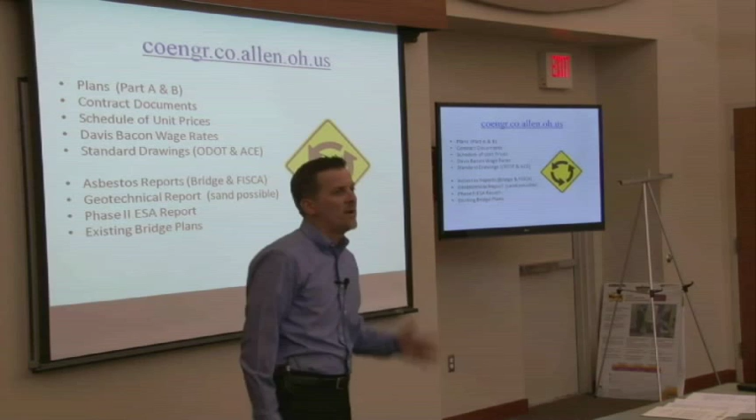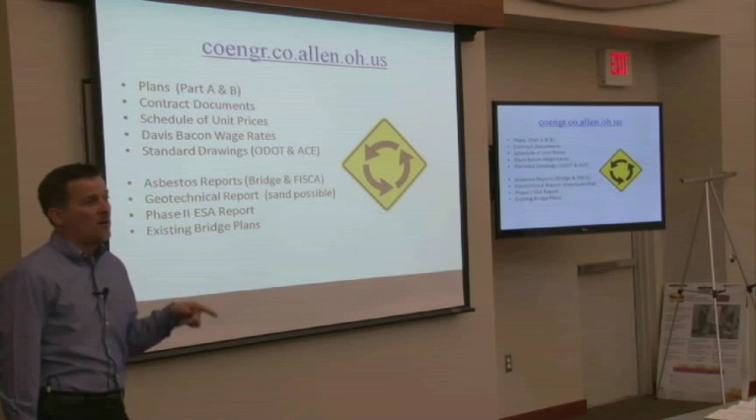But if you have not, and maybe picked up the plans from our office, you can go here and get the PDFs of all the plans, both Part A and Part B, and you can also download the contract documents. Those are password protected, so any of your subs can download that stuff, but as far as the contract documents, I want to know who actually picks up plans, who's going to bid on the job. So if there's any addendums or any changes that come down the pike, I can send those out to all the plan holders. You'll also find Davis-Bacon wages that are requirement on this project, and you will also see all of our standard drawings along with ODOT's standard drawings.

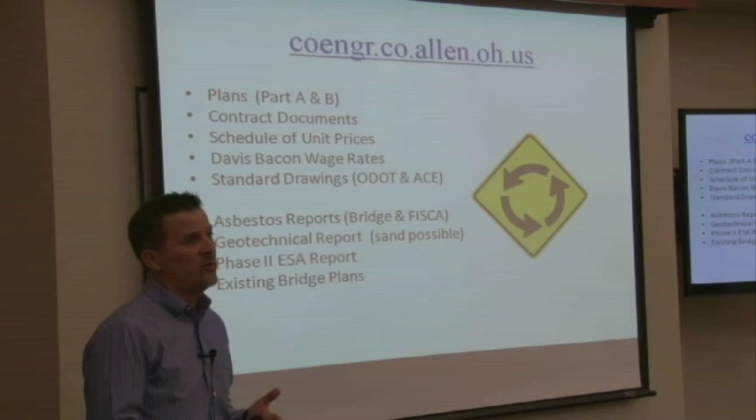In addition to that, we tried to make it as simple as possible for you contractors, and that is that we have supplemental information on there, being the asbestos reports for both the bridge and the FISCA gas station, and geotechnical reports that was done for the project. Just as a side note, on the geotechnical report, I want contractors to know that there has been sand in the area in previous projects, so it is potential that there could be sand in the area. You will also find Phase 2 ESA reports along with existing bridge plans. So those are all great things that are on the website for your use if you care to use them.

This is a roundabout project. It is the first in Allen County. It is also the first in our ODOT district, so we have some big things to cover here. It is a huge project for us. It's probably the biggest project we've ever encountered here at the Allen County Engineer's Office.

$5.8 million is the engineer's estimate. It includes the intersection of Shawnee and Fort Amanda Road, and this is one of the busiest intersections for Allen County with over 14,000 cars per day. So it's very critical for us that we maintain traffic, which is going to be a huge issue for us in this project.

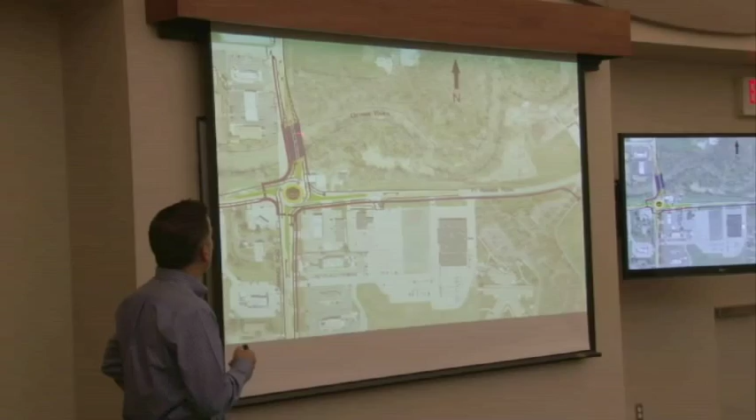Just an overview of the project itself. What we have is a bridge replacement project here that's in blue. At the north end of the intersection, we're talking about replacing the signalized intersection with a two-lane, multi-lane roundabout with splitter islands and sidewalks all along the project on the west side, coming down here in red and crossing over, and then you'll see it on the east side and southeast quadrant of the project along McDonald's and BP and Arby's and some of those other businesses along the east side.

We also have, noted here in purple, a multi-use bike pedestrian path that connects the roundabout and the existing sidewalks in the roundabout to the existing Riverwalk bike path over here to the east. Again, it's just a huge project for us. We're really excited about it, but we're also a little nervous with all the traffic that is out there and the things that we anticipate.

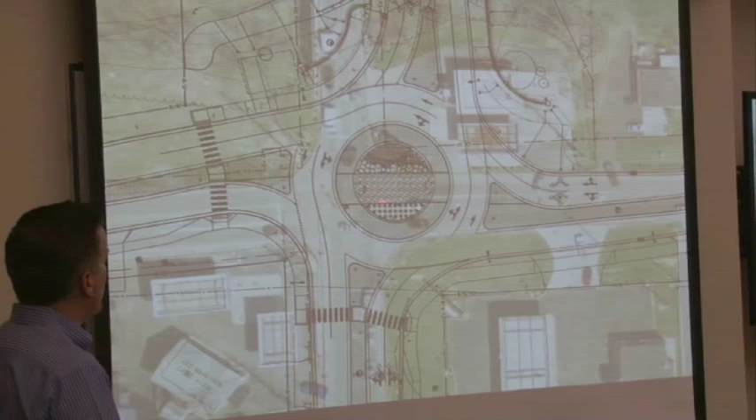This project is somewhat unique as a roundabout project in that we have what we're calling a pass-through through the center of the roundabout. Normally in a roundabout, you have a center island with nothing in it, but in this one, we have to accommodate loads like this.

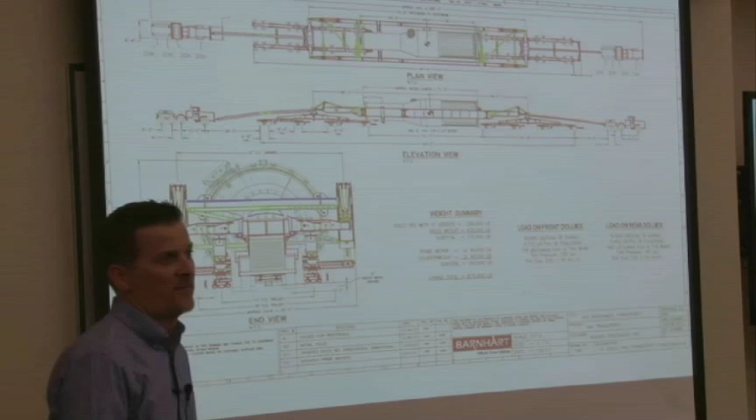This is a load that's trying to be permitted currently to the refinery area. This is a 435-ton unit coming in, a vessel. It is 24 feet 3 inches wide from out to out, being the truss system that's actually carrying the unit.

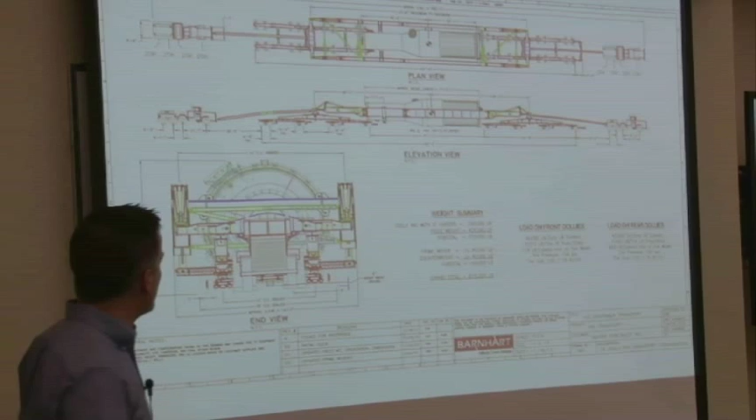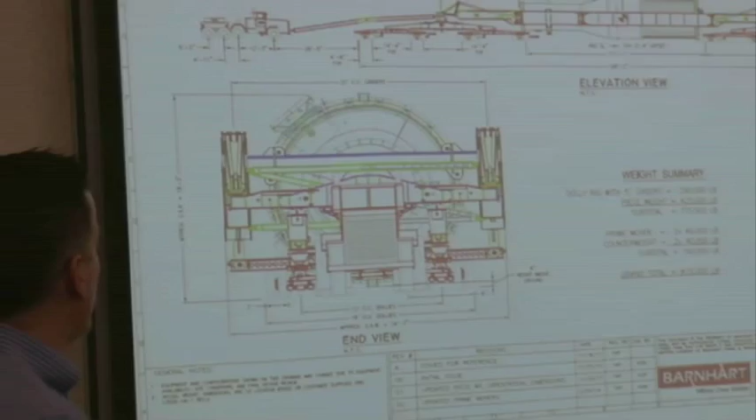So with that, these trucks and these types of heavy haulers cannot navigate through the roundabout, even though the roundabout is very wide and can accommodate pedestrians, multi-lanes with traffic, and also typical semi-truck tractor trailers, but it cannot accommodate vehicles like this.

So that's why we have incorporated a pass-through here through the center island, and with that comes a lot of other issues we have to deal with: signage and crash-worthy items here in the center, and some other items that will come up in the future. But that's what's setting this project off as a little bit unique.

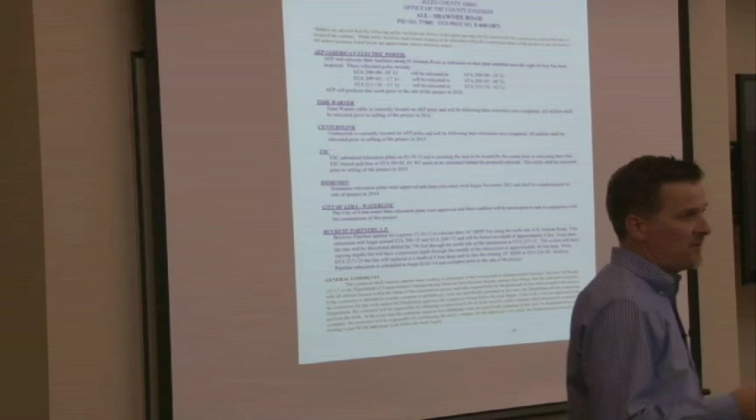I want to go right into utilities on this project. Believe it or not, there are utilities and quite a few of them, and not all of them are here today. First and foremost that comes to mind is AEP, American Electric Power. They have relocated, both transmission and distribution, in the area. The transmission has been relocated on the large steel poles you may have seen if you've been out there.

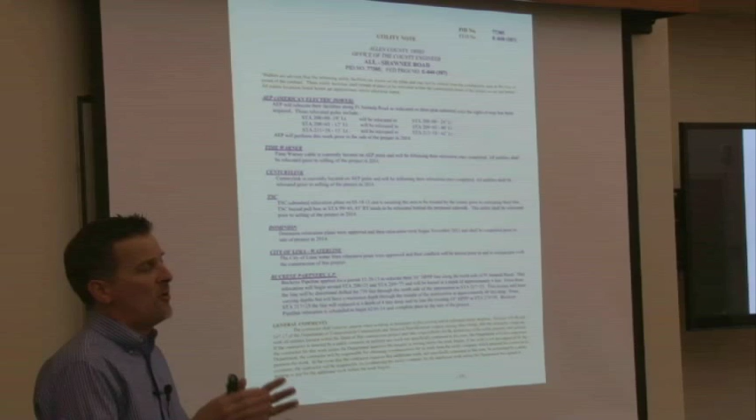Their work is done. But distribution, unlike transmission, can't make that long span across the roundabout. They are unable to do so, so they have moved their lines all but 3 or 4 poles in the Burger King area. So almost all of their work has been completed, but there's a little bit more work to do right there in front of the Burger King restaurant.

And all the other utilities, being Time Warner, CenturyLink, and maybe TSC, are following suit with that. I know some of them are here. We'll go with Time Warner first. Time Warner, I believe, is following right along with the distribution of the AEP. Is that correct? Yes. Okay.

And you are currently not relocated at this point in time, is that correct? Again, what he's stated is that Time Warner is not relocated, but they will be relocating prior to the project. And it's all a matter of moving those lines off the poles onto the new distribution poles.

CenturyLink, do you have any other comments you'd like to make? Is a CenturyLink representative here? Yes, John, correct? Okay, John is here, and I think they're in the same boat, correct? We're currently working on some plans. The utility will be relocated prior to the project starting, but again, they will be relocating on those AEP distribution poles. TSC, is TSC here?

Okay, yes, you're in the same situation. I also know in the southeast quadrant of the intersection, which would be the BP location, there is a handhole that needs to be moved, and we're going to be working with them here in the next couple of weeks to locate their spot where they need to relocate. My understanding from Randy is that's a fairly simple operation and it'll be done prior to construction, correct? That is correct. Okay, excellent.

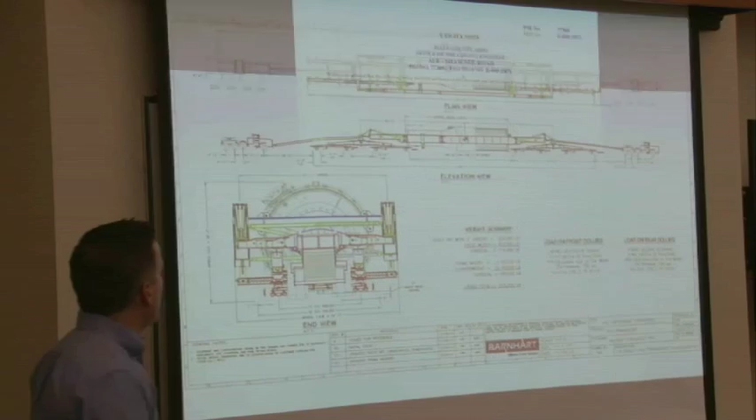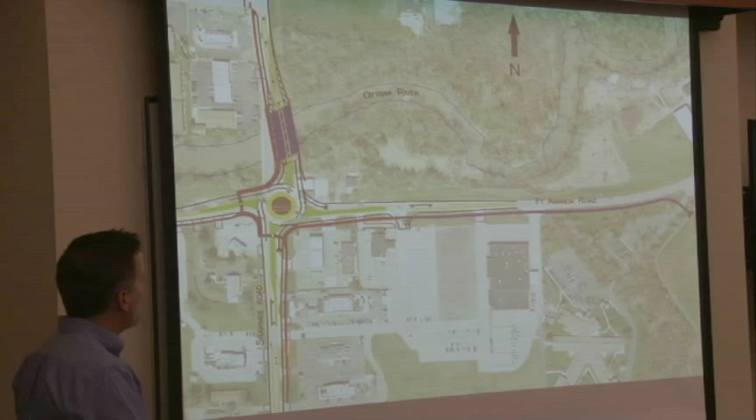Dominion Gas is the next one I have on the list. I see Brian here from Dominion, and they are currently completed with their relocation, is that correct? Just as a reference, their line is along the east side, down here in front of the restaurants, correct, Brian? And so they relocated in that right-of-way, and there's some other relocations along the south of Fort Amanda Road, and then a few more up here along the northwest side of the project. But again, they've all completed their part of the project.

Any comments you want to add to that, Brian?

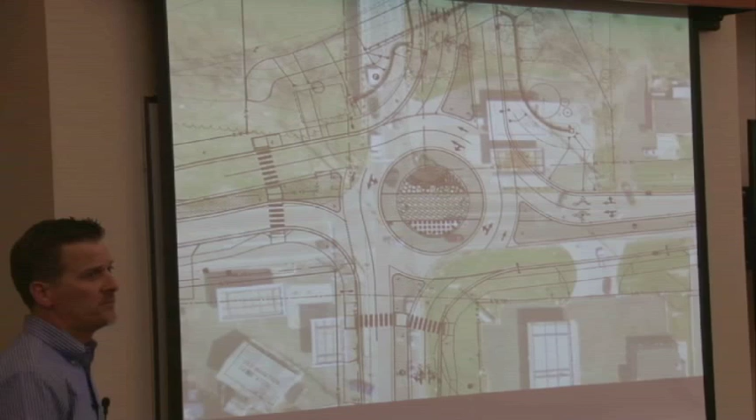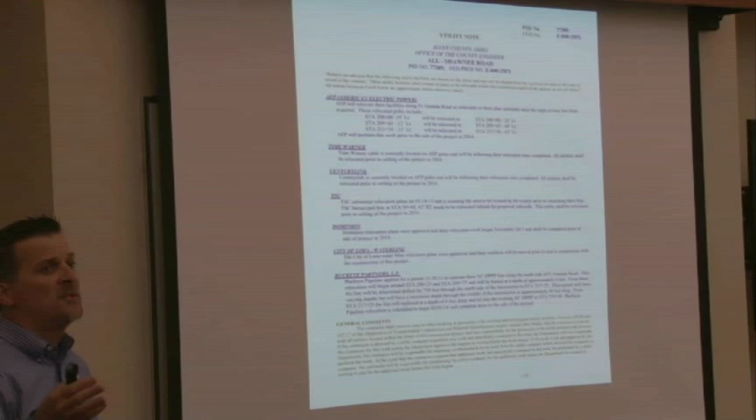City of Lima is the next one I have on there with the water line. They are going to be working on the relocation really kind of during the project. Is that correct, Kent? Okay, do you have any comments you want to make in addition to that? No. Okay, all right, they know what they have to do.

They know how they have to work with the contractor. They're willing to do so. It's a matter of some hot taps that they have to make, is that correct? You have to make maybe a hot tap for us, and then the other ones are all service oriented, correct? Okay.

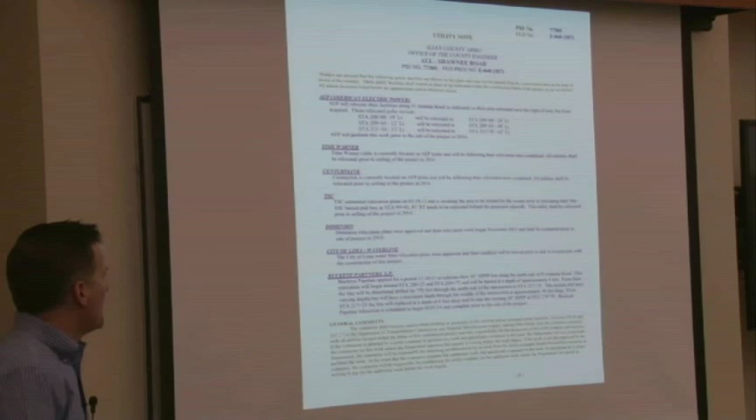And the final one, and probably the biggest one in my mind, is Buckeye Pipeline. Buckeye Pipeline is located in the area, somewhat complicates the project. All along the north side of Fort Amanda Road, Buckeye Pipeline has several pipelines in the area, and I see the representatives here today. With a pipeline being the nature that it is, it's critical, correct, guys? And with that, there's several concerns that we're going to have.

I don't know if you guys want to comment on it. I'm sure you probably do, but there's a lot of heavy flow through these pipelines, and so they don't want them damaged. They don't want them touched. They want to be known when you're working in the area of them, and they want to know if you encounter one.

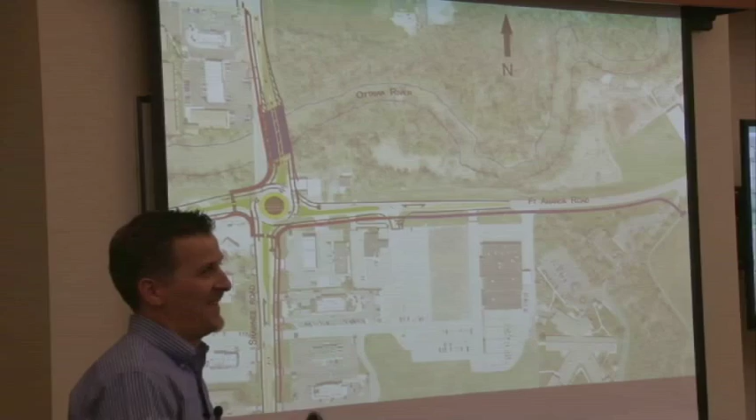If you encountered, Tim has the mic, let's go ahead and give it to Marty. If they're in the area and you encounter an abandoned pipeline, or what looks like an abandoned pipeline, we should already have contacted Buckeye Pipeline so they know you're working in the area. But in addition, when you encounter that, they want to know that you encountered it. They want to come out and make the cut and the cap, because it's their liability with what product is in those lines. So they want to be fully aware, and they want to make the cut and the cap on the end of that. Correct? Right. Okay. Are these right-of-way use restriction specifications part of the bid package?

Actually, they are not part of the bid package. I need to post those on the website. There are some notes in the plans. Let me jump into my part here.

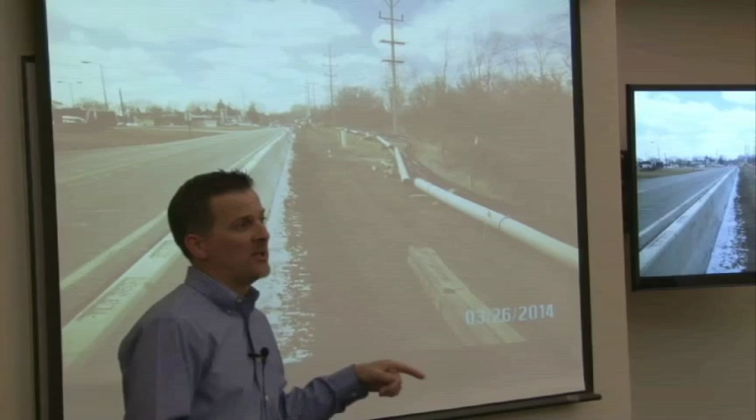Buckeye Pipeline is currently out there relocating their line. The plan is to go 30 feet below the intersection, which will help with that, but they're currently boring that. If you go out to the project right now, you'll see some Jersey barriers out there and pipelines stretched along the north side of Fort Amanda Road, all in preparation for their relocation.

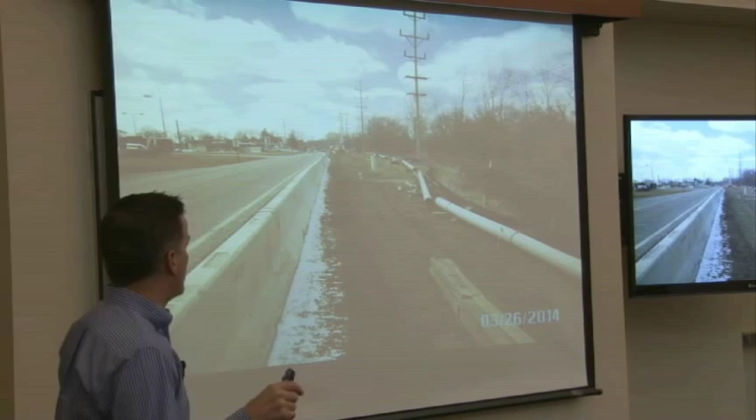But again, if you're anywhere near their line, they want to know about it. If you find their line, they want to know about it. They want to be involved from start to finish on all those things. They have some seismic issues. It's noted on sheet 7.

If you have your plans, on sheet 7 there are 2 notes. One says: Contractor shall contact Buckeye Partners, L.P. before construction work begins to determine appropriate actions when they encounter a Buckeye Pipeline. Then there are other use restrictions that Marty is talking about, and we will post those on the website so you will know what those are. I apologize for not having them already on there.

The second note is about Buckeye Pipeline vibration limitations, and I think that's what those specifications refer to. Right, vibratory rolling is a really big issue when it comes to roads. At both tie-ins we're moving vertically and horizontally, probably more vertically, but we're going to try to get behind the curb. You'll have to roll in that area of curb and under drain, and that's where the vibratory prohibition comes in, so you'll have to note that. You're going to have to static roll that probably more than you would if you vibratory rolled it.

So that's listed in the right-of-way use restriction specifications for Buckeye. That's probably the biggest issue we have, and you've touched on the others. If you bump into it, this is an active 10-inch line. It's petroleum products, high pressure, westbound coming out of Lima. It goes along the north side of Fort Amanda Road, and once it gets out to about Wonder Lake, it peels away and heads northwest. It is petroleum products, but it's going to be deep—that's the intent, to get out of the conflicts in this area.

There are cathodic test wires attached to it, and there is cathodic current on it. Anytime you're within 25 feet, generally our broad-based specifications want us to be notified. The good thing is we're just down the street, so by all means give us a call at the kickoff. We'll come to the pre-construction meeting, give out business cards, and let us know when you're going to be in the area. We'll be there to make sure you steer clear of Buckeye.

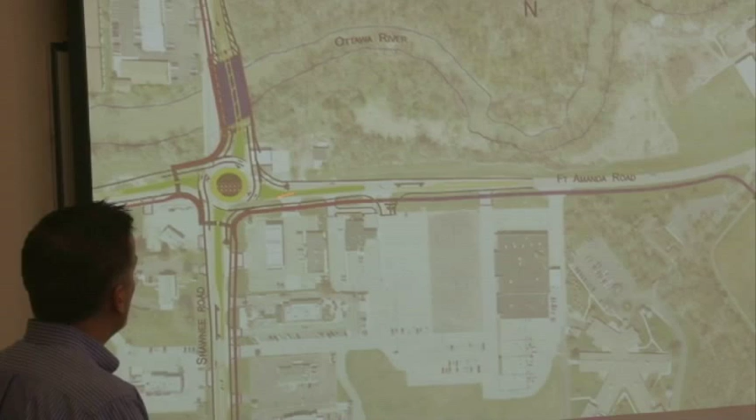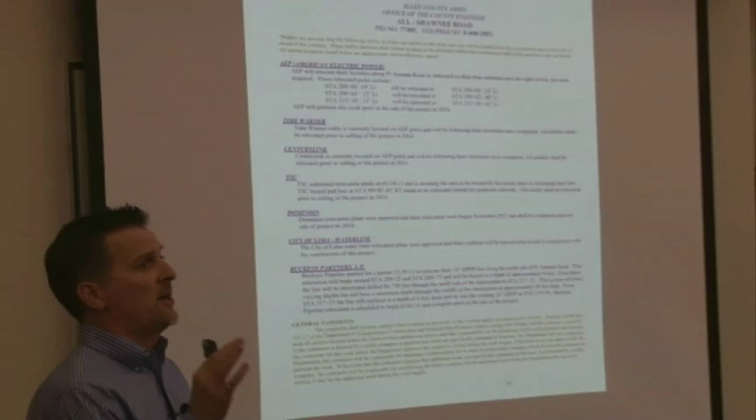I think what Marty was referring to, there's at least 3 locations their design consultant has gotten with us and sent plans of, that are going to be a problem. I think that's this area with a curb. There's also a couple drop catch basins in there that they anticipate we're going to be really close to those lines, so we need to be aware and make those calls to Buckeye Pipeline prior to the work being performed. That's a critical utility we need to keep in constant contact with.

So as you can see, there's a lot of utilities there, a lot of entities involved. With this project, there's 2 other entities we're involved with, 2 of our favorites. One is the feds, because they're supplying the money for this project. The second is the EPA, because we love bats, snails, and mussels.

So we've done some pre-work already. Our crews have been out to comply with the Indiana bat restrictions, and we've already chopped all the trees down and removed most of the brush, so contractors won't have to deal with that. More importantly, the deadline's met — all the trees have been removed prior to that deadline that the EPA likes.

And the Army Corps of Engineers is a huge issue, as it is with every project. With this project there's a lot of federal money involved, so there's a lot of oversight from ODOT, but also probably some federal oversight because of the size of the project. Contractors need to be aware that with the feds looking over ODOT's shoulder and ODOT looking over our shoulder, we're certainly going to be looking over yours to make sure you're following this Army Corps permit and any other restrictions placed in there.

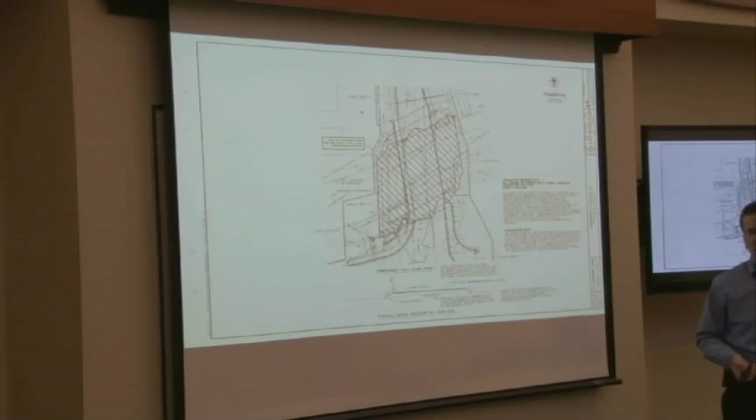This shows page 179 of the plans. It details the information about the in-channel work. The fill area — I've been told many times already by ODOT, the environmental coordinators there, that it has to be clean, non-erodible material placed in the fill.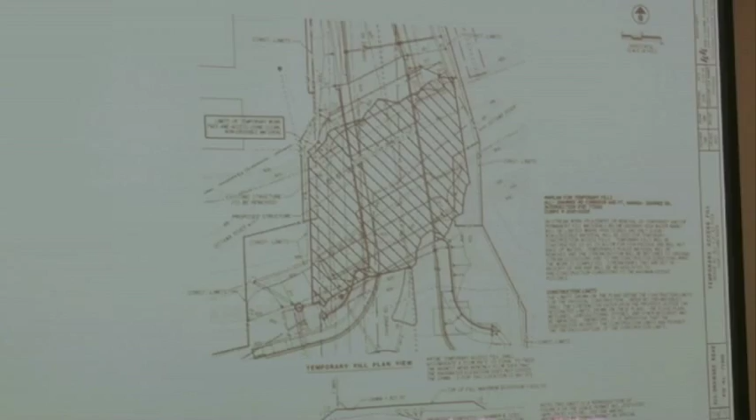And also, if I can note on the plans — there's another note in there, date restrictions on page 7. Stream impacts, date restrictions on stream work. Please note that in-stream work is not permitted between the dates of April 15th and June 30th. That's a key note everyone should know on page 7 of the plans.

Other restrictions on this project that make it a little more difficult: the abandoned Fiscus gas station on the northeast quadrant of this project. Not only do we have Buckeye pipelines going through there, but an abandoned gas station. The owner walked away from it and left the tanks in place. Even though regulations require that after a year they're supposed to remove those tanks, they did not — they claimed bankruptcy, and as it sits, we acquired the right-of-way on this project, but in this case by easement, so the property is still owned by the gas station. What we need to note is we need to remove those tanks as part of the project, along with the gas station and the overhead canopy there.

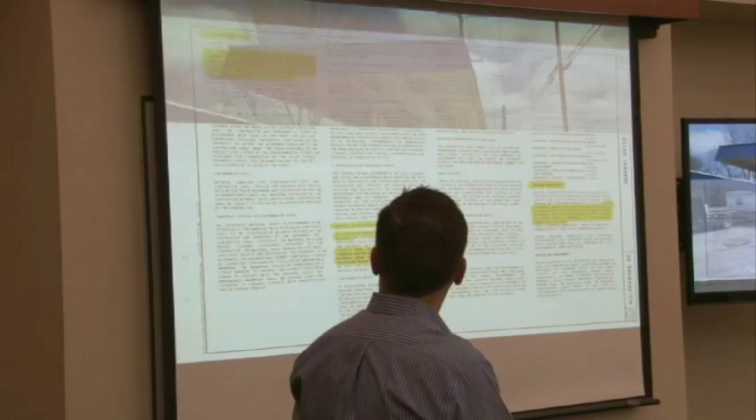Environmental studies have shown that there is potential for encountering petroleum-contaminated materials and hazardous waste during demolition and excavation of this property. When we started doing studies of this project, our design consultant went out and did some test borings. They did samples of the inspection wells, and there was 1 foot of free product inside the inspection wells of this gas station. Within 2 days, the gas station was closed.

Within a week, it was completely vacant. They came in and pumped out the tanks, but left the tanks there. Being the fact that there was 1 foot of free product in the inspection wells, we imagine that there is some contamination around the tank area. How much contamination, we don't know. The owner of the parcel was not willing to remove those, so we're removing those as part of the project.

As far as the EPA and BUSTR is concerned, this is a question that's already been raised: what is your extent of the contamination that you need to take care of? We were told that all we have to do is remove the tanks, and any contamination that we expose in removing those tanks is our responsibility. Above and beyond that, it's not our responsibility. Meaning that if there's contamination on the entire site, we are not responsible for that. We are responsible for what we excavate out.

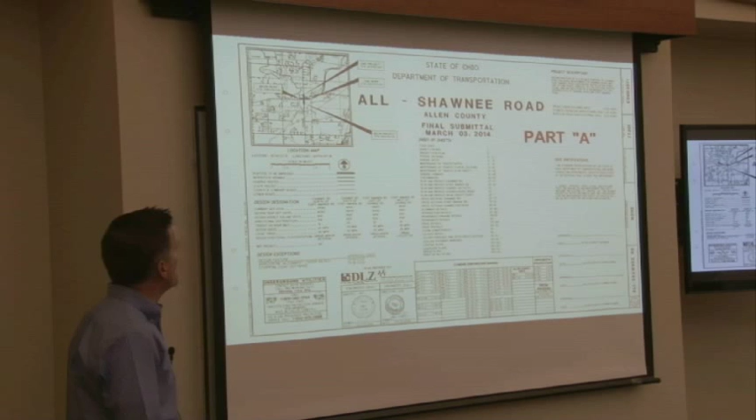Here's just a couple of screenshots of the plans, Part A, Part B, 211 sheets. This is sheet 7, just the notes again, Buckeye Pipeline notes on there. There is the alternate bid for the geogrid material, Part A, alternate 1, alternate 2 for the proprietary product. I'm showing again that date with the in-stream work - no in-stream work between April 15th and June 30th.

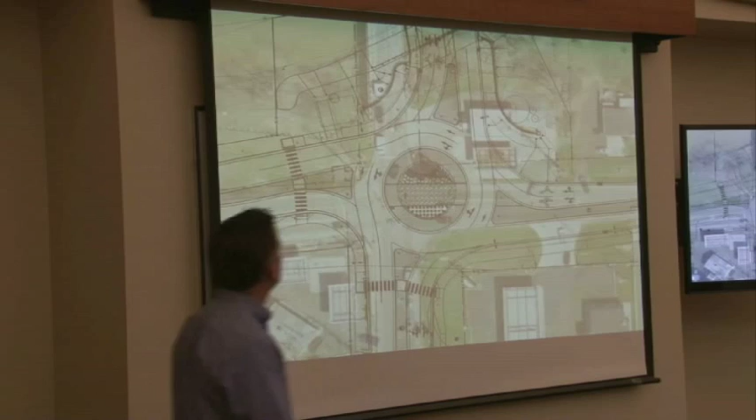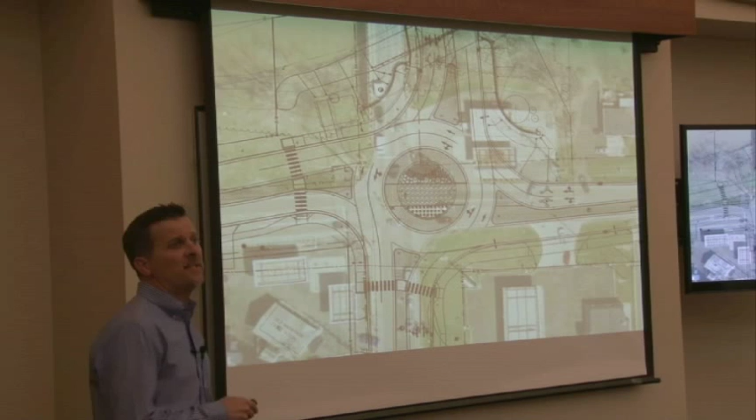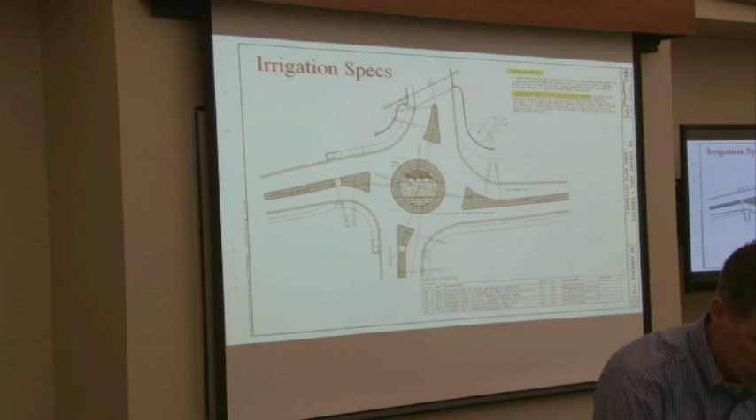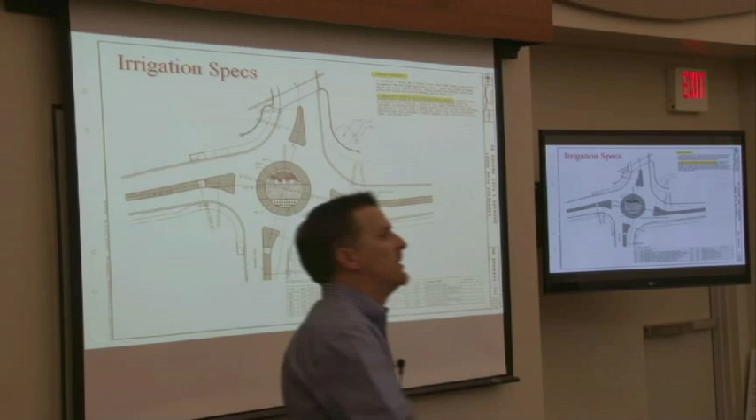There's another difference in this project - because of this center island, we have some landscaping. Landscaping requires irrigation, so there is an irrigation spec in the plans, sheet 143 it looks like, and in that we have specifications that the contractor is supposed to do the plans for the irrigation system. Contractor to design and install irrigation system to include all the necessary piping, sprinkler heads, and so on and so forth involved in the irrigation system. That is not design, that is a contractor's responsibility. It's my understanding that when you buy irrigation systems like that, they typically will make the design for you, so contractors are required to do that as part of the bid.

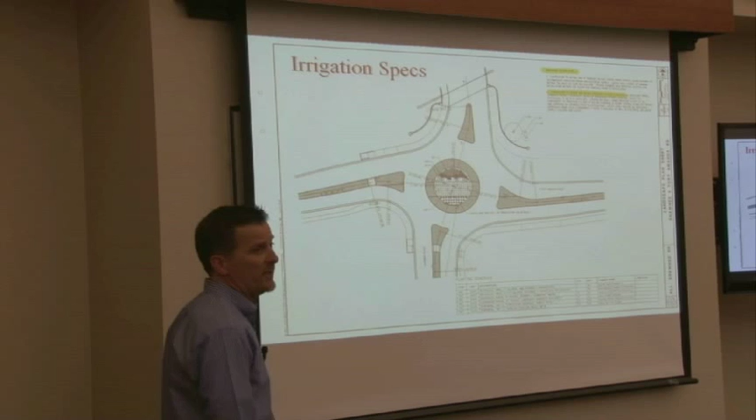Because this is a pass-through, we're taking oversized loads through this area. There is another kind of unique feature that we are putting in there, it's on sheet 10 of the specs front. It is a bid item for 601, articulating concrete block system. What that is, it's a support system - it's like I call it a high-tech concrete cinder block turned on its end. What you do is you have the voids inside that concrete block, and we're going to fill those voids with topsoil.

In that topsoil, you have grass seeded, so the center island will have some grass effect look to it, yet it'll still be able to maintain those supersized loads that come through. Those supersized loads, we've had 5 in the last 3 years, so they don't come by all the time. They're not every week, just periodically, and we need to accommodate for those, but we want to maintain a landscape look inside the center of the island.

So that's what there is out there. It's my understanding, I've talked to a supplier, there is another supplier that wants to get a crack at that, so there may be some tweaking involved in that as well. If you have an alternate to that, we may consider that.

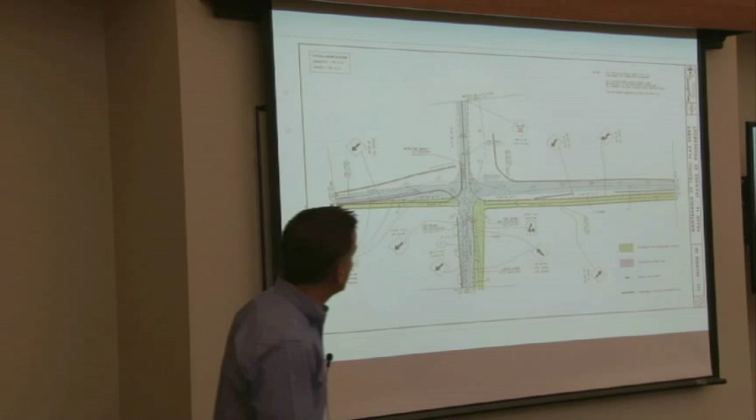The other thing I just want to mention is that Shawnee Township is just to the east of that - their fire and rescue is there, so we really want to be cognizant of that. We want to make sure we're accommodating them as best as possible. If there are going to be any closures, we want to try and let them know in advance as much as possible because we're in such close proximity to the fire and rescue and police department that we want to make sure they're aware of everything as much as possible.

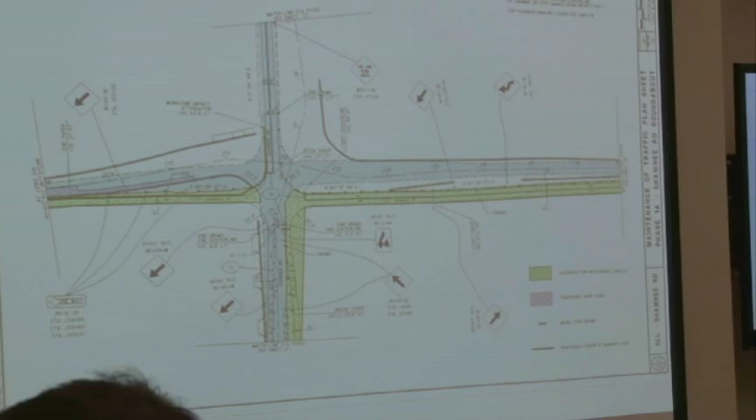That's existing or temporary pavement constructed here in the light green. I think the reason is to build all the curbing and everything else on the north side that's detailed here, and to do that they put it in the plans to have one-way traffic going westbound. Correct? That's correct — I think there's only enough room to maintain one lane and build the whole leg of that roundabout. So that's currently how it's set up.

If you have a modification that would work, we would entertain that. Our concern is you've got a deep run of pipe where 85% of your drainage outlets in that corner of the job. The first manhole you have to put in coming out of that water quality structure is actually underneath the existing bridge.

And then that pipe run has to go under the existing bridge footer, under the approach slab, into like a 12-foot deep manhole that would be out in the middle of the new roundabout. We're concerned if that's even doable.

Obviously you need those runs of drainage put in so that most of the rest of your drainage throughout the job can drain, to maintain positive drainage. But putting that run in the manhole under the existing bridge, and then having to have a run of pipe coming under the existing footer while you're still using that bridge — that run of pipe needs to be done as one of the first things on the job.

We don't have an answer for you, we just have a question. We'll take that down, and then we will try to get answers and put that out as an addendum. Okay, so just trying to repeat the question.

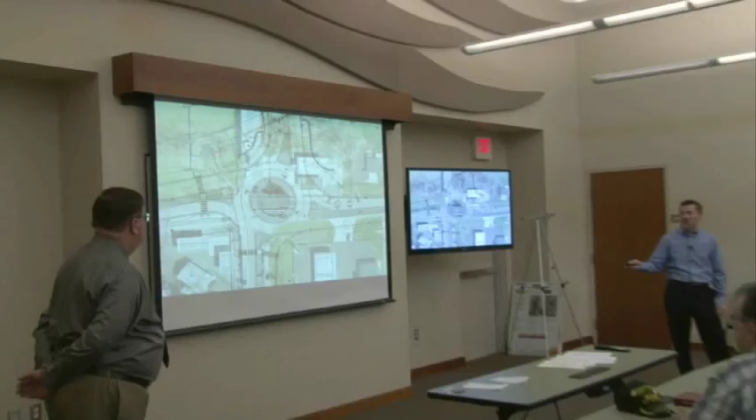Your question is there, right there in the northwest quadrant of the roundabout or the intersection — there is a drainage facility there, basically a whirly jig to clean your... what will we call it? I can explain it and show you on the plans afterwards, but basically we think there's a constructability issue with that drainage to meet your phasing.

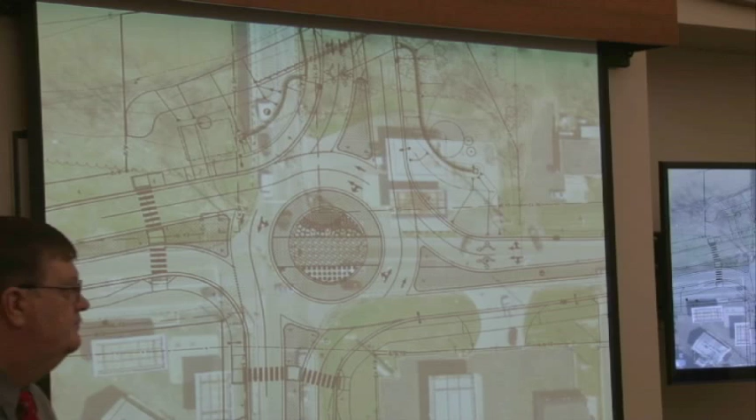And we don't have a solution for you either. We just see a big problem there. So you're asking about constructability of that water system and the drainage system into the center of the roundabout. We will look into that and get back to you.

We will post, by the way, not only this question but any answers to the questions that you raise, on the website as well. So I want to clarify that. We will look into it and answer what we can on the website.

Your second question deals with the subgrade stabilization. You guys have some items set up for, I believe, cement and then curing coat. There's no item set up for subgrade stabilization by the square yard. Usually those all go together — you pay by the square yard, then the tonnage is purely for the cement they incorporate.

So per the ODOT spec, you're missing at least one item. Sometimes, not always, there's a fourth item for the design of that. Typically it's bid under just a generic 4 or 6% cement content, and if you have a large enough quantity, you might want them to do a design because you might save some money — they might only need 2%, or they might need 8%, depending on your soils. But at least you've got a design that you know will work for your soils. So it's worth looking into.

We think there's at least one bid item missed. And you're saying what bid item would that be? It'd be item 206, subgrade stabilization, bid per the square yard. The square yard should match with your curing coat, so your takeoff's already there — you just need the item.